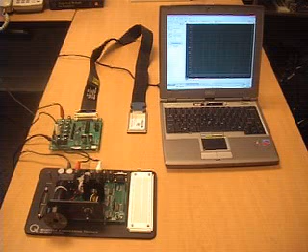Components of the system that we're using here today are the DC motor from Quanser, and essentially I have two signals coming in and out of this DC motor. I've got one which is my command signal, it's an analog voltage, and then I have a tachometer, also another analog output voltage, and I'm going to interface those to my PC through this interface board, which essentially just breaks out all of the lines available here on my National Instruments data acquisition board. So I'll plug that into my laptop and be then commanding and driving all of that from my software here on the PC.

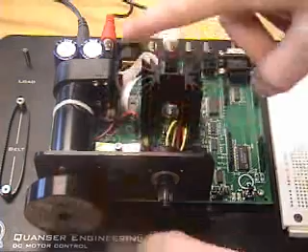The tachometer, as I spin the motor, essentially will output a voltage that's proportional to the speed of the shaft. And the input voltage that I have in, again, is coming through basically a power amplifier, and that controls the speed of the motor proportionally to the value of the voltage coming in.

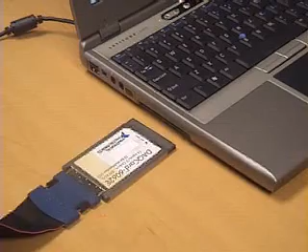So this particular data acquisition card has analog input, analog output, counter timers, and digital lines. The analog input and the analog output are both 12-bit. 500 kilosample is the maximum sampling rate. And in this case, we'll essentially be using one analog input to read the response of the motor and one analog output to control the motor. My PCMCIA DAQ card will connect directly into my laptop through a PCMCIA slot that I have here on my laptop.

So this part of the demonstration, we're going to talk about the system identification of the DC motor. So in this case, we're going to do that experimentally. And so the setup here is I have my software ready to run, and essentially the software is going to send an analog output voltage to the DC motor, which will be a square wave, so essentially a step response. And then we'll read back the tachometer signal to get the response of the DC motor from that. And then from the stimulus and response data that we have received through our software, we can actually get a transfer function for the DC motor.

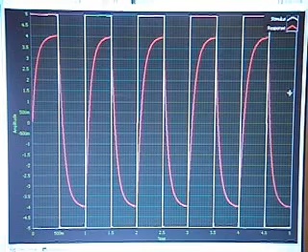So we'll go ahead and run the software, and here you can basically see the motor going back and forth according to the square wave. From the plots here we can see our two signals. The white signal is the actual command signal that we sent to the motor, and then the red is the actual response signal that we read back from the DC motor tachometer output.

Okay, so here we're showing the system identification software, which will allow us to create a model for our DC motor. So it takes the incoming step response signal and allows us to vary the type of estimation that we're going to use. We can change the different orders for the coefficients, and the result of this process, of course, is an actual transfer function that we can use to model that system.

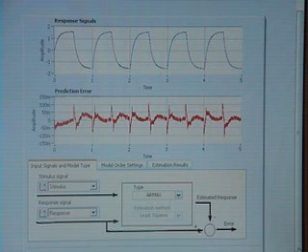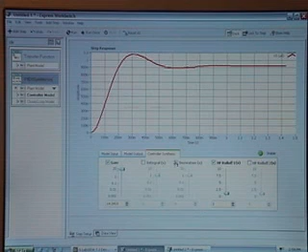The next step is to do the control design. Now what you can see here in the software is the actual transfer function model that I have obtained from my system identification. The graph that I'm showing you here is the step response of the controller, and in this case the controller is a PID controller. If I go ahead and select the derivative here, you can see the corresponding change in the step response of the model. This allows us to adjust the proportional, integral, and derivative gains to obtain the response that we want from the system.

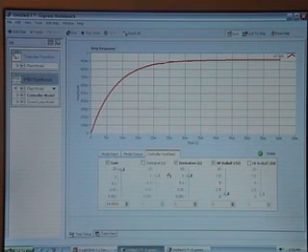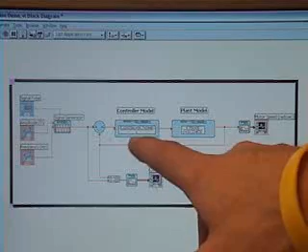So here you can see the LabVIEW block diagram of the simulation. So now that we've got a model for our plant and we've finished our control design, we'll actually want to implement that here in simulation so we can see the response to an incoming signal. So what we see on the block diagram is we have the model of our controller, so that's what we would have designed maybe with our PID software. We have the plant model here, which is the model of the DC motor. And essentially what we're going to do is generate a signal from LabVIEW and insert it into that system and see how it responds. And this would give us a good idea of what it would look like if we were actually controlling the motor.

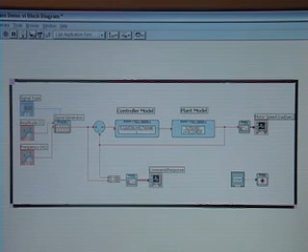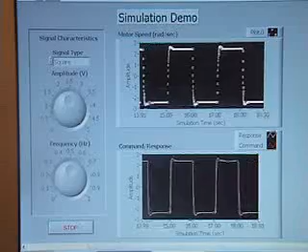So this is the front panel of the LabVIEW diagram that we just saw. And essentially what it's doing is simulating the response of the DC motor to a square wave or a step input. On the left we can change the amplitude of our signal there. We could change the frequency of the signal. And we could also change it to a different signal type to make sure that our controller is responding the way that we want.

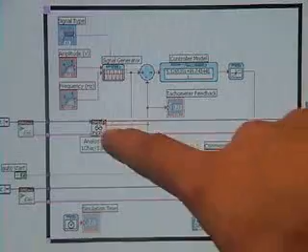Now the next step is to actually implement the control through hardware. So you'll see I essentially have the same diagram. I still have my controller model shown here, but you'll see I no longer have a plant model. In essence, the model or the transfer function I was using before is now going to be replaced with the actual DC motor. So in this case I have an input signal coming in here, so I'll read what the DC motor is doing. I'll send it through my control loop, and then I'll output the correct voltage to keep it at the speed that I want.